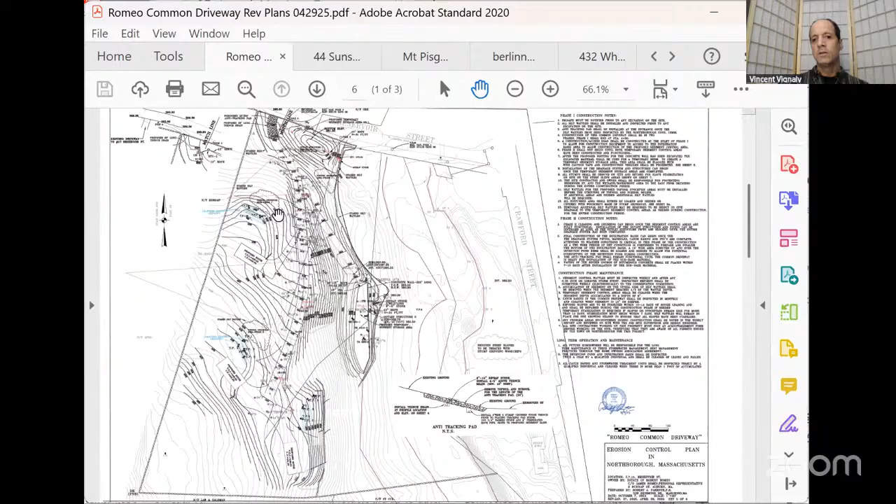The grading needs to be changed, so that's pretty much the process: they have to file and then show they're minimizing it, and that's what they've done.

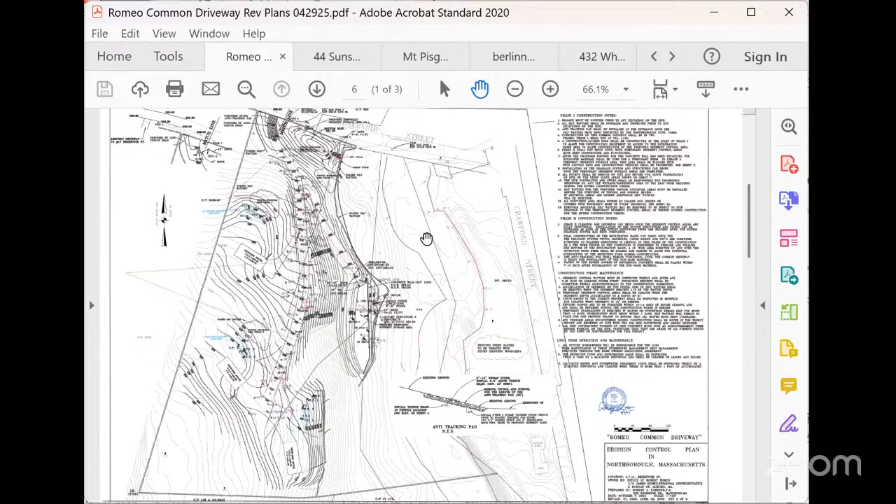Okay, so the areas of trees that would remain, is that delineated beforehand, or is that up to the contractor or developer? No, that is delineated.

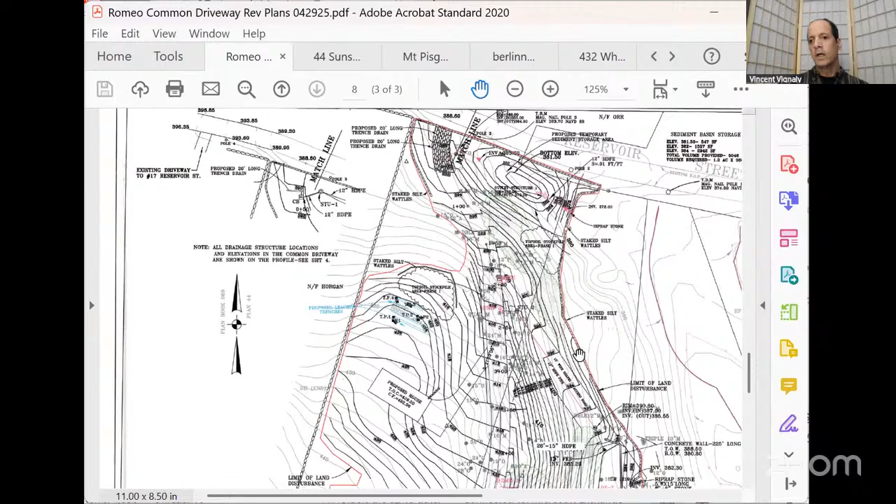It's hard to see this, let me zoom in and not lose the idea. So there's a delineated limit of alteration that runs along here, and this is the downhill side. They also need a perimeter barrier so that any runoff doesn't go down into the brook. So this east side is more firm, but this line here, it's a red line.

And actually, I think that's what that note there says.

The limit of land disturbance will all be surveyed and located in the field. And then it continues on this side here. So they're saving some along the property line up here, and then they're saving this area down here.

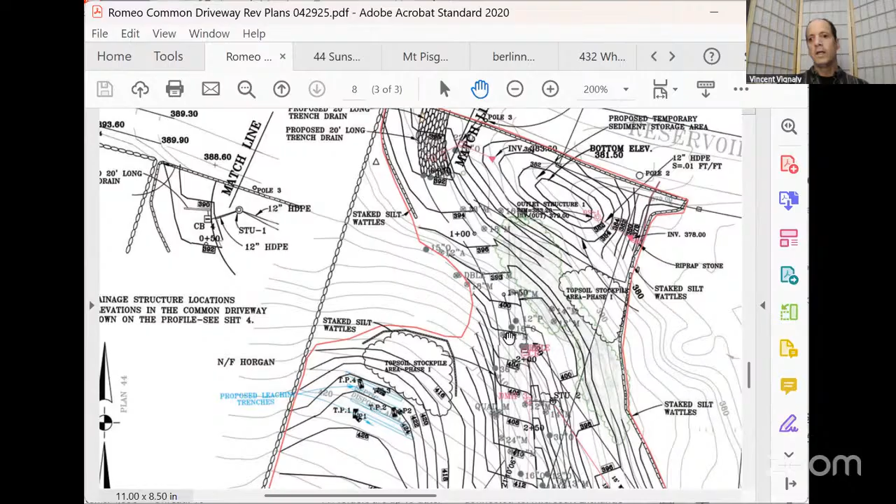So it is delineated on sheet, I think that's sheet 8, if you want to look at the plans that are the same plans that are on the planning board's website.

Okay, thank you. Does that help, Michael? Yeah, it's just really hard to see some of these lines online. Even when you zoom in, you kind of lose perspective, and it's kind of difficult to understand what they mean. There's just a lot going on, so it's hard to see when we look on the planning board site.

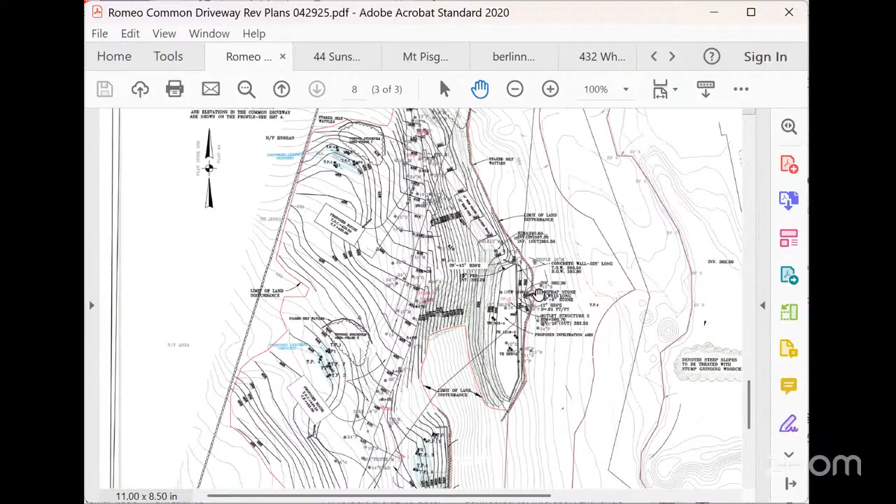But that helped things. Yes, and that's why as part of his application, he started with I think 6 plans, and he's now up to 9. So he's showing things on each plan a little differently, so it's a little clearer. It's still very busy, so that's why I'm an old timer - I like the ones you can roll out and look at them in detail.

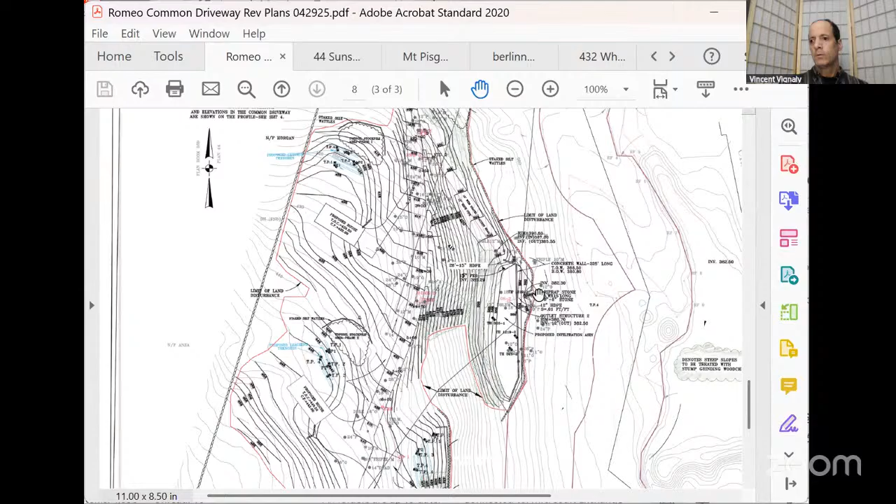Okay, Vinny, are there any hard copies floating around town hall? If you come in, I have hard copies, so we can look through those. I know the planning staff has them as well as myself. So there you go, Michael, there's an option to go to town hall and actually look at the hard copies. And we're open till 7 tomorrow night.

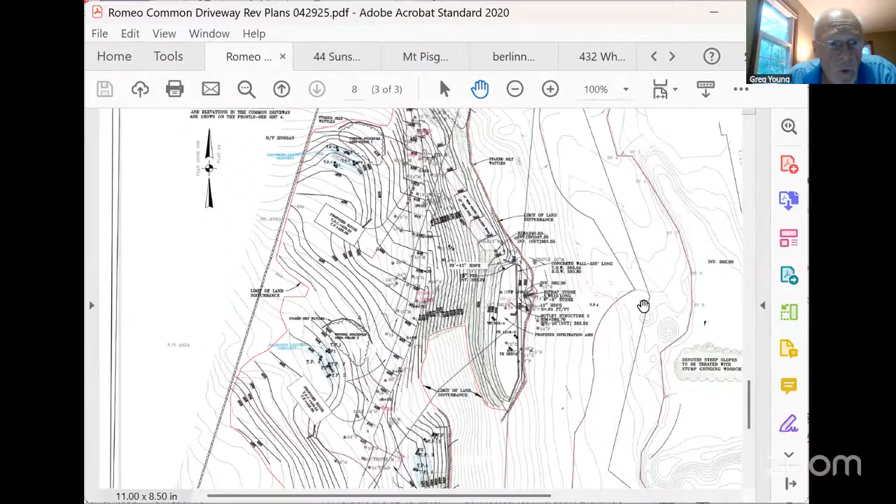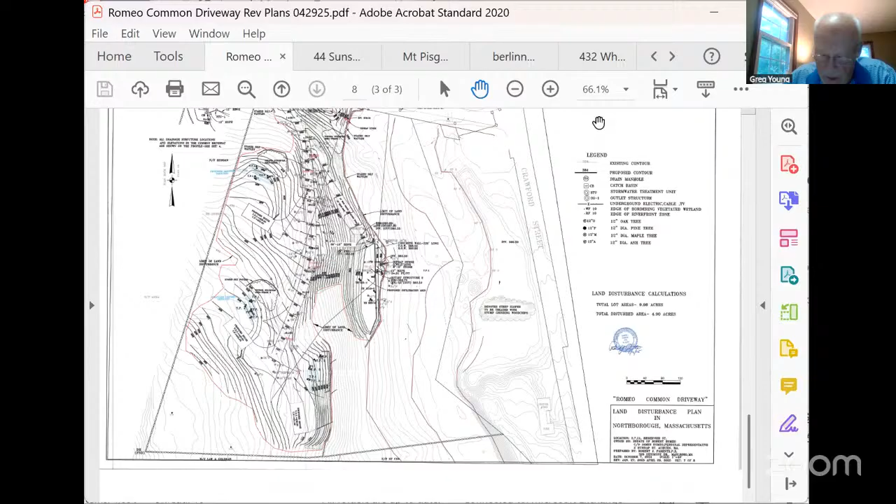Okay, so if there's no more questions, I don't see any more hands up, we can go ahead and vote on this. So let's start by closing the hearing for 3711 Reservoir Street.

So moved. Is there a second to that? Second. Second by Justin. Roll call. Dan Clark, yes. Justin Dufresne, yes. Todd Helwig, yes. John Johnson, yes. Sadie Stone, yes. I vote yes. So the hearing is closed.

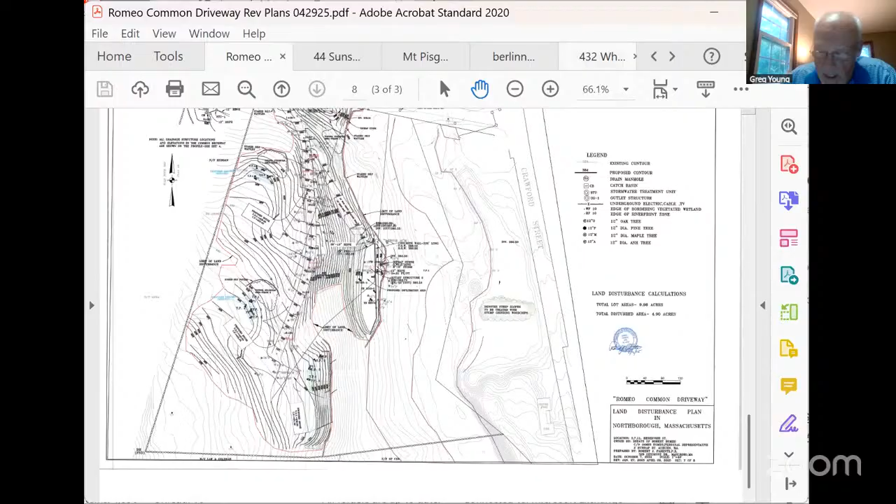So Vinny, we're going to vote to issue a permit. Any special requirement? Well yes, there are special requirements on it. You highlighted earlier about a pre-construction meeting and information prior.

Yes, and this is a land disturbance permit, so we have typical conditions, and they were also required to provide surety, so that if they go out there and alter more than they're supposed to, they have to have a bond, a cash bond posted with the town, so that we're able to execute that bond if something goes wrong, or if they try to walk away and don't stabilize the site, we can bring the site back into a vegetated cover. So that's part of this as well.

And now, who determines the bond amount? I'm sorry, who determines the bond amount? I did. I do it based on a formula that Fred and I had worked out a couple years ago. And what's the number on this one? Ooh, I was afraid you were going to ask that. I think it's $28,000.

Okay, all right. It's based on the 4.9 acres and moving 6 inches of material to get loam out there, and then hydroseeding 4.9 acres and putting up probably about 400 feet worth of sediment control barrier. So it's an estimate, and it should be, it's probably high, but that's the way we like it.

Okay, then we're looking to vote to issue a permit, land disturbance and stormwater management permit for 3711 Reservoir Street. So moved. Is there a second? Second. Seconded by Dan. Roll call. Dan Clark, yes. Jess Dufresne, yes. Todd Helwig, yes. John Johnson, yes. Sadie Stone, yes, and I vote yes.

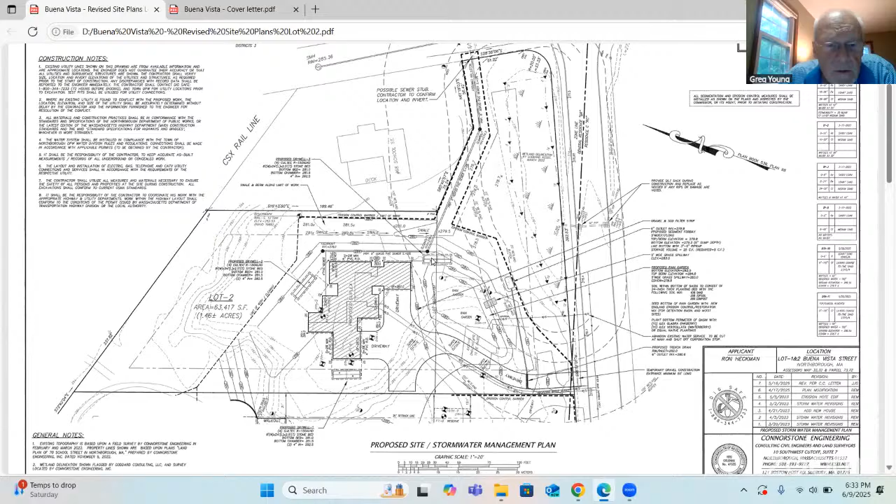Vito, what's for that area that you're going to be working in inside the 25-foot? What's the plan to protect the wetlands from that?

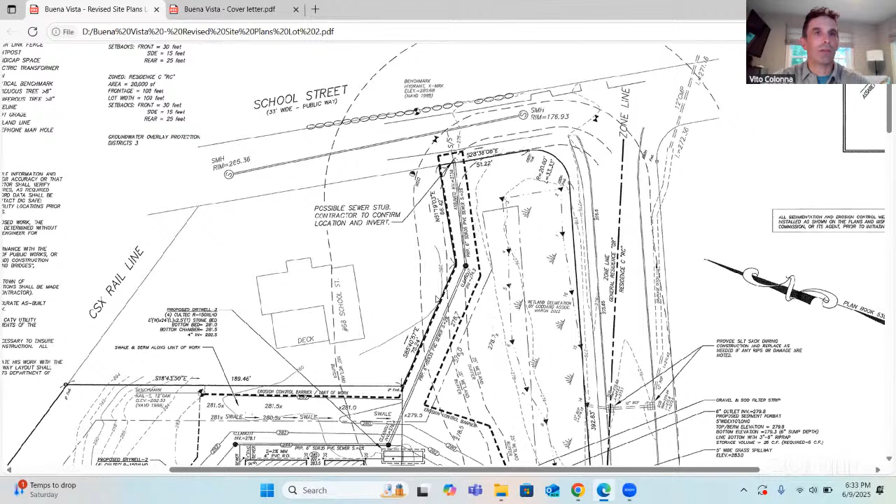So on this we would just have perimeter erosion control, sediment controls. I think on this one we had silt fence with straw wattles, whatever the typical detail we had. Let me just see what we were using, sorry to scroll through. It's a pretty flat area too. Yep, sediment, so it's a silt fence with straw wattles. Yeah, the area is pretty flat through there, right in that section.

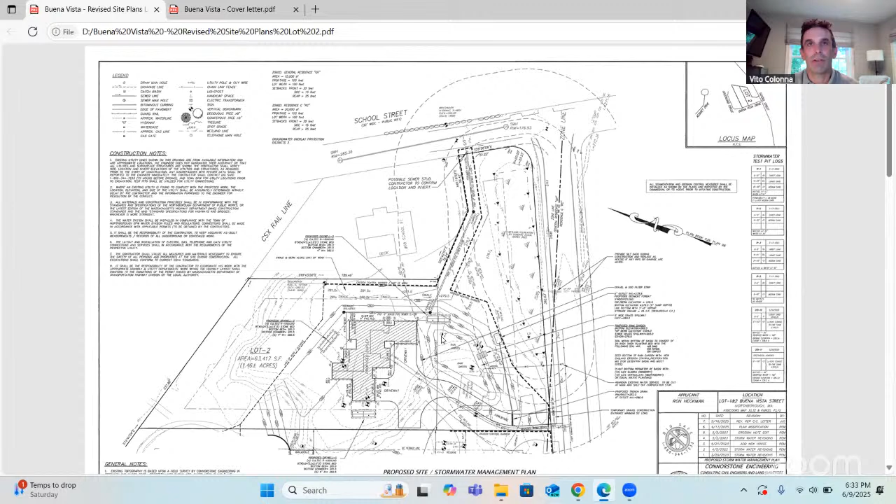So they should be able to get in and out of there fairly quickly, especially if they do this. The intent would be to do this during the late summer when everything's at its driest, so that way they don't encounter much for groundwater, so we can get it in and out of there pretty quick.

Vinny, you're good? I am, yes, he addressed the comments that I had. We were talking about potentially casting, when he excavates this, casting to the uphill side so we have as little impact as possible close to that wetland area, just in case something happens, we get a thunderstorm in the summer, that kind of thing.

Any questions or comments from the commission? Concerns? No? No. Let's see, any audience questions? I don't see any hands up.

Okay, then we need a motion to close the hearing for an amended order of conditions and an amended land disturbance permit, the amended stormwater management land disturbance permit, for 2 Buena Vista Street.

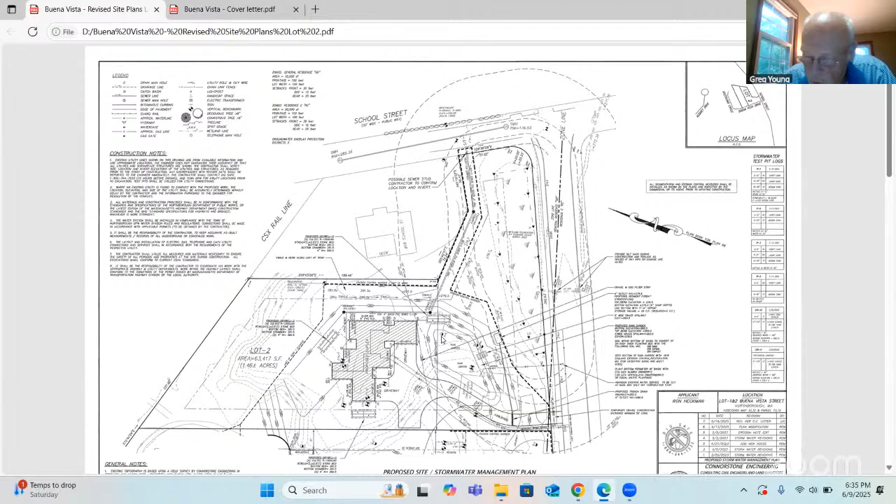So moved. Is there a second? I'll second it, seconded by John. Roll call: Dan Clark, yes. Justin Dufresne, yes. Todd Helwig, yes. John Johnson, yes. Sadie Stone, yes. And I vote yes. Hearing is closed.

Nothing else, no special conditions, Vinny, right? Just our typical conditions, yeah, that would be it, nothing in addition to those. Did we have a marker for signs on this one, on the far side of that stormwater dike, or did I forget the berm? I can't remember if they were included in the previous order. Can you just add that in? They might have been, but I think they would go along with signs, just maybe two signs down there. We don't need a string of them.

You talking about the sewer connection? Yeah, one down near the sewer connection area, and then one up on the back side of the proposed stormwater basin. As you drive up the driveway, the stormwater basin's on the right side, and this would be to the right of that to note there's a wetland in that area. Okay.

So then we need a motion to consider the request to issue an amended order of conditions and an amended stormwater management land disturbance permit for 2 Buena Vista Street. So moved. Second, second, John Johnson.

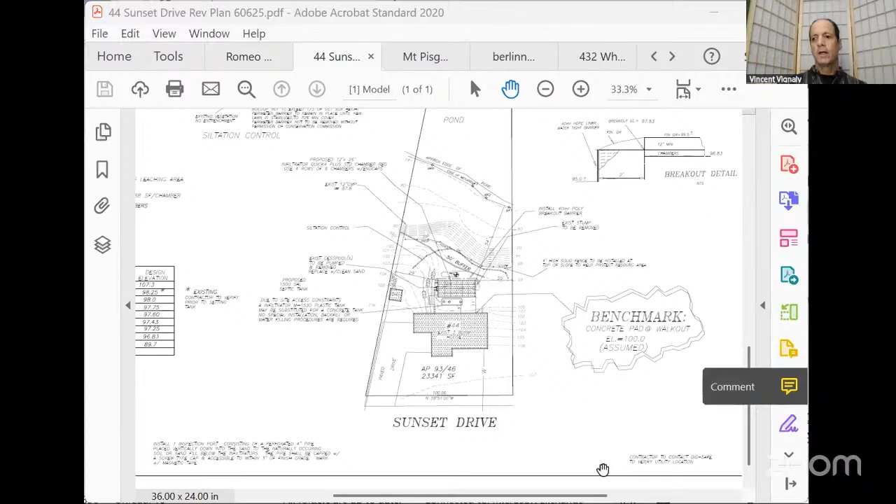All right, and I'm going to ride shotgun, I'm going to pull up the plan on my screen, and either I can present or he can. Bill, I think that's the one. I don't see him yet. There we go. No, we lost him. Maybe he thought I was on a roll. It might be. Bill, okay, Bill, I can see you're there, but you're muted and your camera's off, which is fine, but let's unmute at the very least.

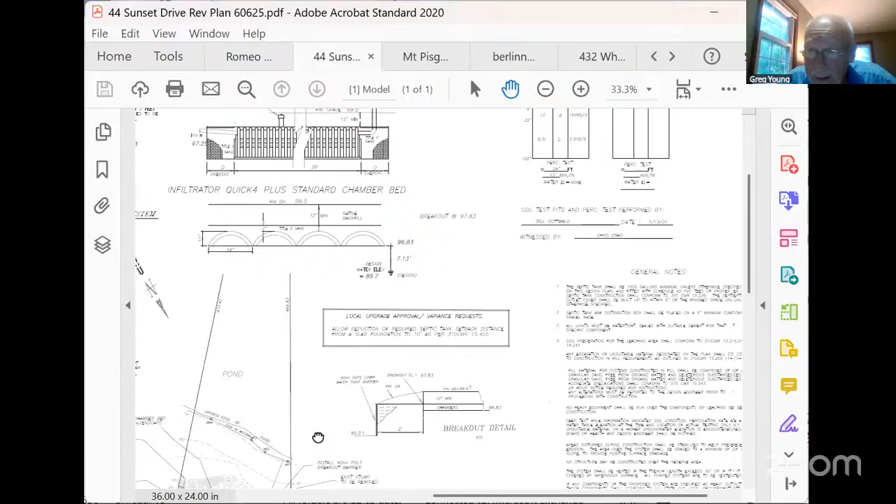Bill, do you hear me? Wouldn't be a Ron, would it, Vinny? A Cindy or a Ron? I don't think so, no. Well, if they're not raising their hand, then yeah, William's with us, but he's muted and he's got his camera off. He said he didn't have a lot of high-tech stuff, but I think the muting he'd be able to handle. William, can you unmute?

Okay, Vinny, I guess you want to do it yourself then. All right, I've got it. So this is on Sunset Drive. Yes, the alignment. Sunset Drive in the drawing is at the bottom of the picture, but that has the north arrow going down.

So just for orientation, this is the big pond wetland, and then farther to the south is the wetland behind McAfee Park there. And so this is Sunset Drive here, and as you drive in from South Street, it's on the right. I'll zoom in a little if I can get up there.

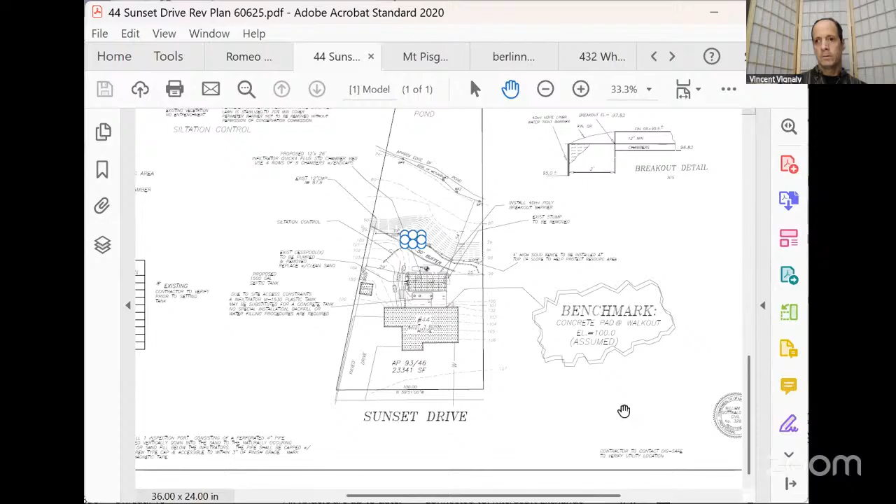So this is a site where the house is set up close to the road. It's an existing house. It has a failing septic system in the rear, and they're proposing to install a new septic system, and the wetland is in the back here. So there's the pond, edge of the pond is here. The wetlands are very close because this is a very steep slope, and so their closest point is here, about 52 to 54 feet away from the septic system.

We have a bylaw in town that prohibits new septic systems from being within 100 feet of a wetland, but they're allowed to be within that 50 to 100 feet if it's a repair and there's really no other feasible option. In this case, they have some very mature trees out in front, and they would have to pump the sewage from around back because the existing sewage comes out the back. It's proposed right here to go into a septic tank and then into a special leaching area that allows for additional treatment, so they have a little bit smaller size because the treatment method has higher efficiency. This hasn't been approved by the Board of Health yet, but we're waiting for that - they wanted to come to the commission first to find out if there were any concerns. As long as they're 50 feet away, that's the concern in the bylaw.

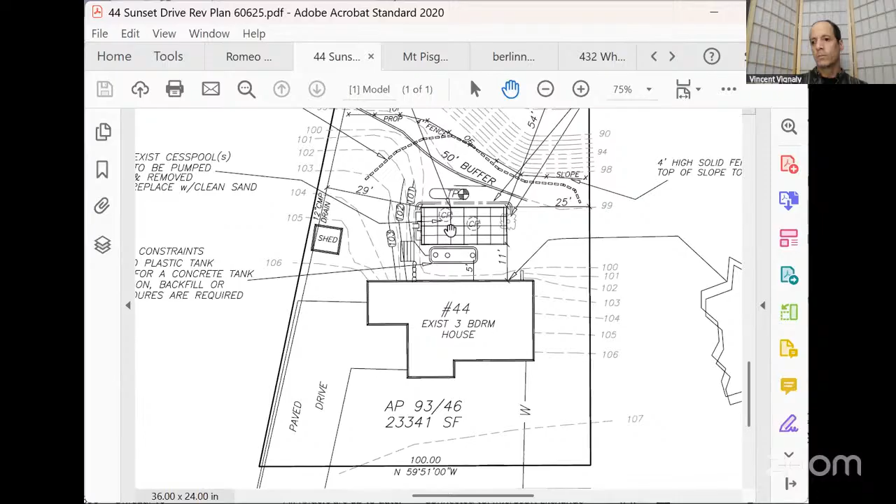So I would like to add a condition that based on a decision by the Board of Health on the number of existing bedrooms in the house - if it's 2 bedrooms, then they're going to need to refile and amend their order of conditions, but if it is a 3-bedroom, then they would be allowed to continue and go on as proposed. Sure, that sounds reasonable to me.

So it is an improvement. They're doing a lot of work on the house. It was an old timer that was there, and he hoarded things, so they spent about a week with dumpsters just hauling stuff out.

Okay, I guess I'm open to questions. Any questions from the commission? I've got a hand up here too, from iPhone number 2. Let's find out what that's about. Okay, iPhone 2, I'm bringing you in as a panelist.

In process. Anybody there? Nobody's there. Can you hear me now? I can hear you, yes. I'm sorry, this is Bill Gottwald, I'm the engineer. I just got a new iPad earlier today and was trying to set it up, and that's why I couldn't get through. I get it, not a problem.

Vinny told everything. The only thing I'd add is that right now it's a cesspool, not even a septic system. I checked the building records. The building permit was issued in 1957, occupancy in 1958, and they have no record of anything ever being done as far as bedrooms.

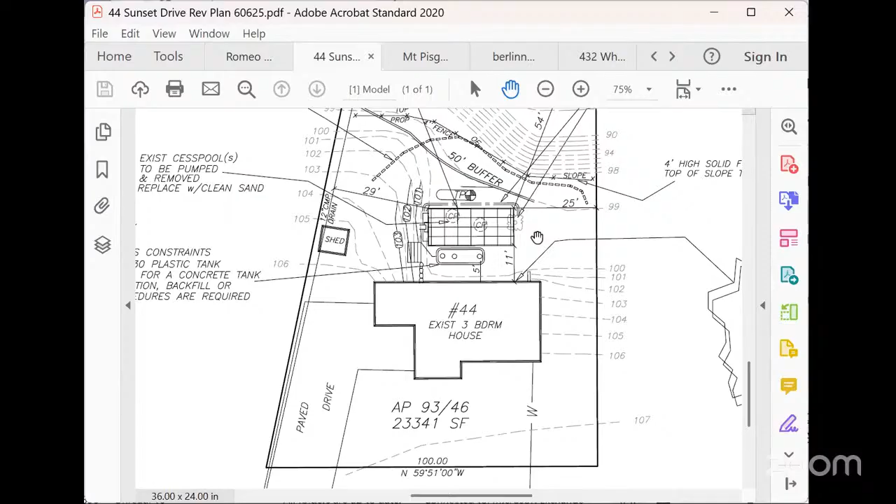Any questions? Good, thank you. Any questions from the commission? No? Everybody's comfortable.

So Vinny, you're looking to have the special condition you mentioned earlier - if for some reason it's considered a 2-bedroom house now and it goes to 3, this deal is off and they'll have to refile. Yes, or request an amendment. Yes, fine, okay.

Okay, I've got another hand up here. Hold on, Cindy. Cindy, we'll let you speak. You can talk, you should be unmuted. Yep, good. Go right ahead. Hello? Nope, nope. Nothing, Cindy, huh? Can you hear? Well, if I can ask you can hear me, that's probably not going to help. Okay, well hopefully you're unmuted and okay.

So, Vinny, where were we? I'm sorry. Unless there were other questions, I think we're ready to vote to close the hearing. Okay. Last chance, Cindy. Okay, we need a motion then to close the hearing.

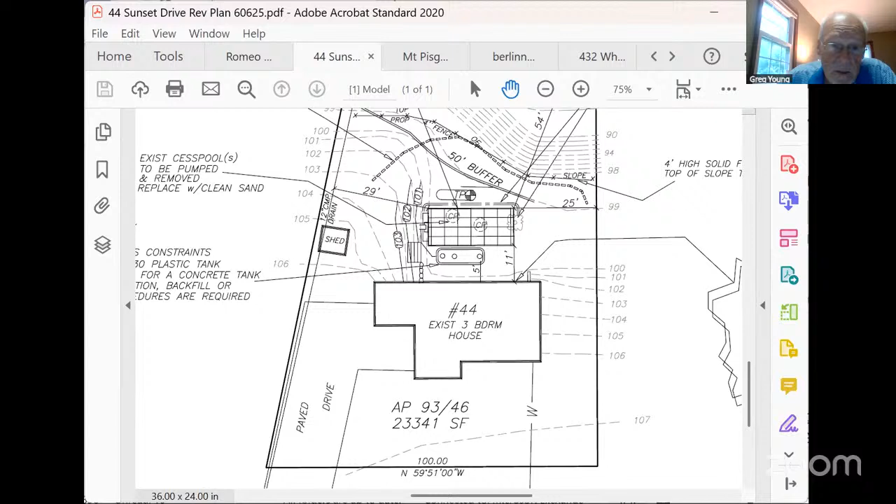Yes, yes, okay. So we need a motion to issue a negative determination for 44 Sunset Drive with conditions as outlined. So moved. Is there a second? Second by Sadie. Roll call: Dan Clark, yes. Justin Dufresne, yes. Bud Helwig, yes. John Johnson, yes. Sadie Stone, yes. I vote yes. All set.

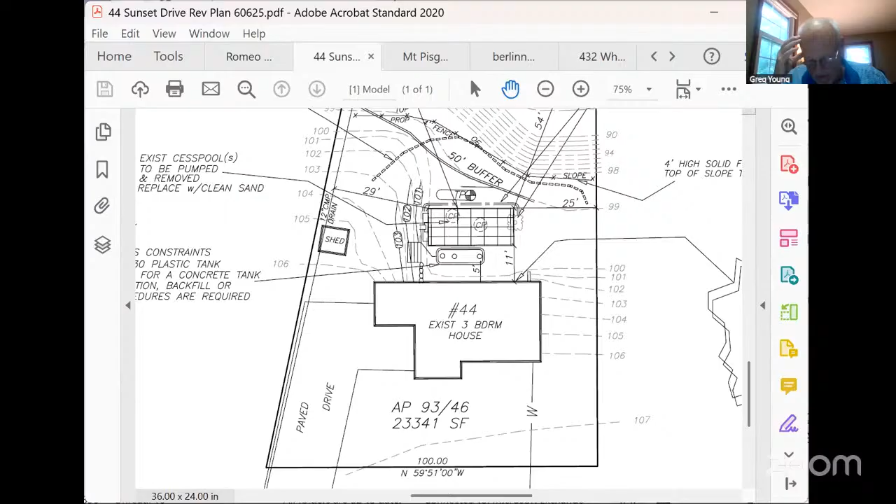Okay. Continued notice to amend the Northborough hunting policy on conservation land. We talked about this a couple of months ago.

To allow deer hunting on all conservation land, subject to some requirements. Vinny, do you want to encapsulate that for us? Yes, what has been advertised would allow the commission to...

Rescind all the policy requirements on hunting listed in the town's hunting policy enacted in 2001. We talked at the last meeting about limiting hunting to deer only and complying with all other state and federal requirements. There's currently a high deer population, and it would be helpful for vegetation and flora to have some control on the deer that are overgrazing.

There've been deer strikes, so the DPW director submitted a letter supporting the idea of allowing hunting. I contacted the police chief, and his statement was that hunters are good rule followers, and whatever gets put in place he's sure they would comply. He has no hesitation to change the policies however the commission sees fit.

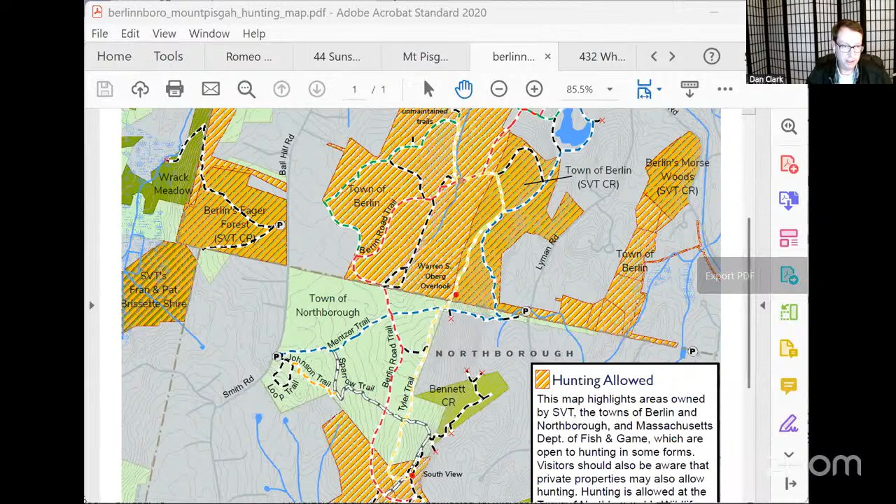So Dan, there are still some protections — the statewide protections will still be in effect. Some people raise safety concerns; I hear that a lot from non-hunters about being in the same woods with hunters. Those regulations address some of that, but more importantly, the facts show there are almost no instances of non-hunters getting injured by hunters. Typically it's hunters who injure each other accidentally — that happens more than anything else. There are plenty of good examples around Central Mass where hunting and other recreational activities take place simultaneously, and a lot of people know that and start wearing hunter orange around that time of year and go about their business.

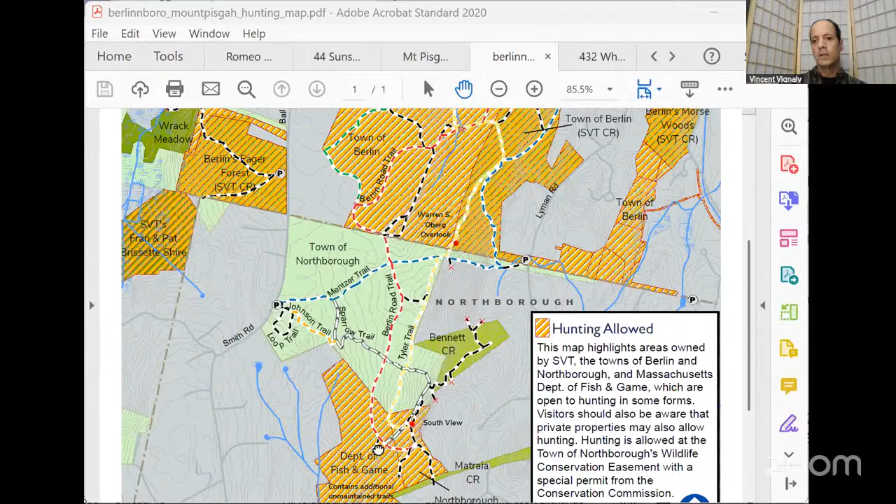While Dan was talking, I brought up the Sudbury Valley Trustees map. This is the town line between Northborough to the south and Berlin to the north, with Boylston to the west. The hatched, tan-colored areas are allowed for hunting. This green area in Northborough, owned by the Conservation Commission, is where hunting is limited, and the area directly south of it too. Even going down that trail into Northborough, you're in the huntable area within the Fish and Game land — the Division of Fish and Wildlife allows hunting there. This is what we discussed at the last meeting: once you're on that trail, don't assume hunting is prohibited just because you're on it — it's allowed to the north and to the south.

Okay, all right. Any more thoughts from the commission on this?

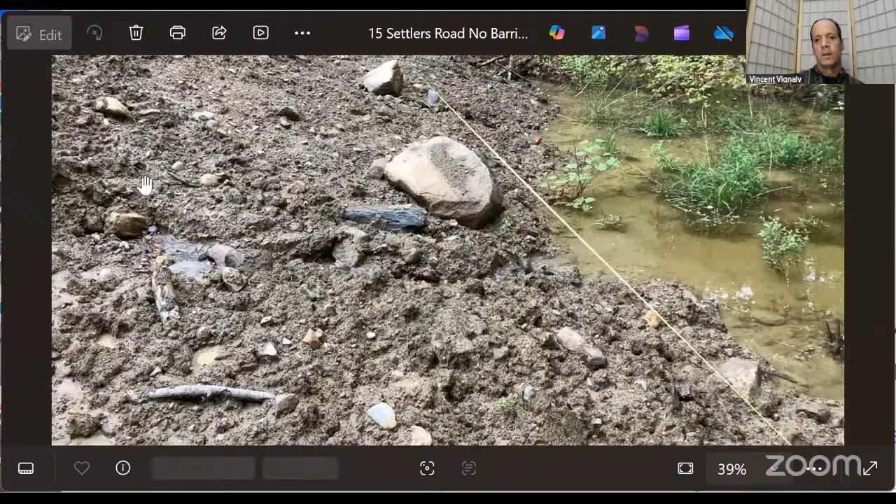That's sediment, turbid water with wetland plants popping out. So that's not a good situation. There's a trickle of water, actually a flow of water that comes right out here and is washing more turbid, more sediment-laden water out. And this is the wetland with no barrier. You can see that this is a wetland here with the tree growth, but there's no barrier between this altered area and what was an isolated wetland.

And I'm going to close this to get back to another image of the plan so you can see what was possible.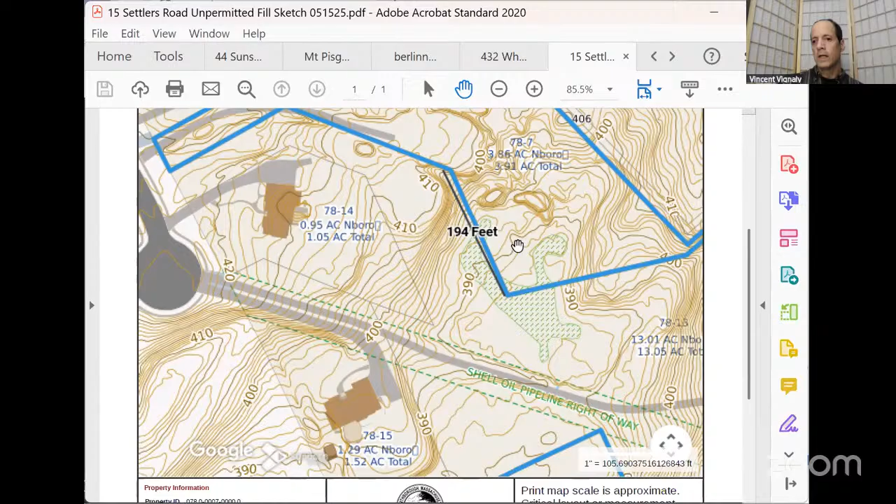So we've got a situation where a lot of fill is unapproved. The commission issued an approval on this under the local bylaw only because this is an isolated wetland. So they were supposed to build a driveway to a house and have a yard, but they were supposed to have erosion sediment controls around this area here.

None were shown along the back. I think there was a problem with issuing this permit because I believe that there are wetlands within 100 feet of this work. So again, this is another one where I need an enforcement order to encourage the property owner to install the erosion controls or sediment controls that were approved, and then file with the commission to determine whether this really is a wetland.

Which really looks like it is a wetland from the map. Is that... what's that number? Nope, that was the other one, sorry.

This is the area that is shown for the property owner that lives here at 17. They have an order of conditions that shows this area as wetland all the way up and around here. So I believe that this is wetland here that was not shown on the original submittal for this 15 Settlers. So we've got a little bit of work to do on this one.

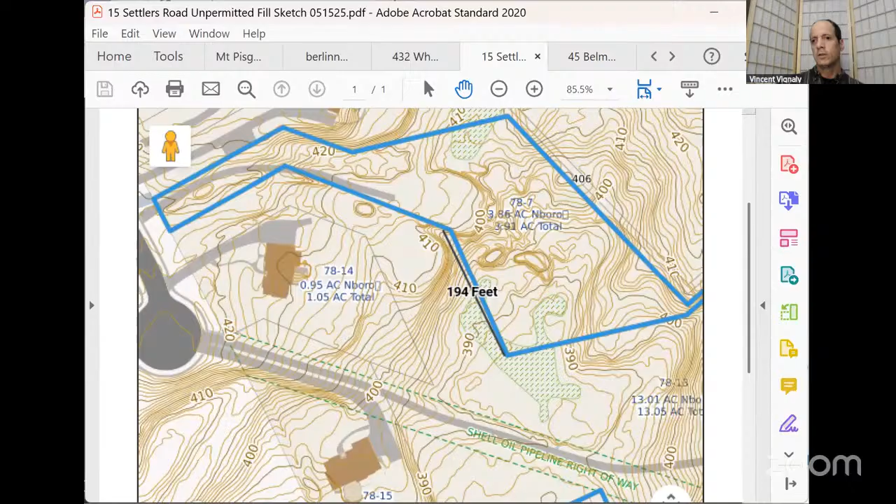So I'm going to pull out of this one, and then I'll pull up those photographs again. So this photo is looking from the middle of that lot that was in blue, looking to the north, and this is the isolated wetland, and there's no sediment controls out there.

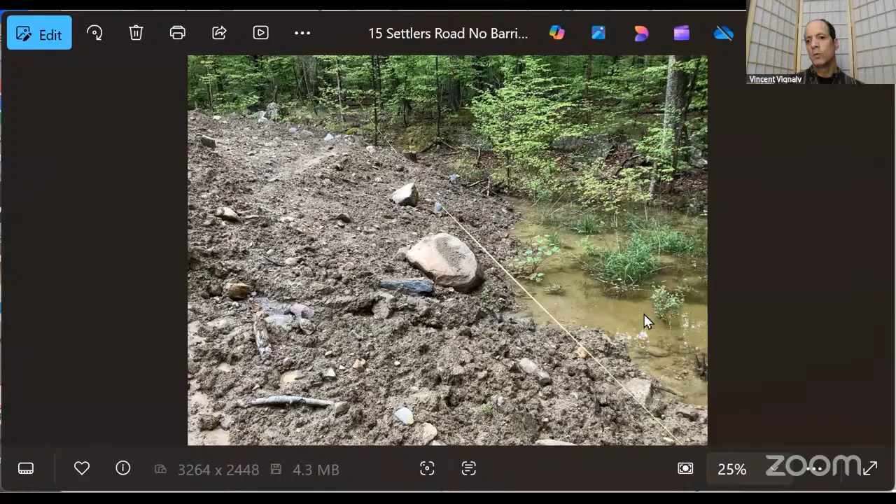This is down at the right side at the limit of the work with the wetlands and the limit of fill, with no sediment control.

A different view of that same area, and this is looking down to the property at 17 Settlers. You can actually see some of the driveway kind of through the trees, way in back. You can kind of see something there, and that's where there's a culvert that goes down and feeds the wetlands downstream as well. So this is a wetland that's connected through.

So what I'd like to do is get an enforcement order. I'd asked them before this meeting tonight to install sediment barriers here and up on the other side where the isolated wetland is in place. I went out there last Thursday, and there were no barriers in place. So that's why I'd like to get an enforcement order issued on this one as well.

Okay, did they actually fill the wetland there? Yeah, I think so. It's hard to tell, but the first thing was to stop the bleeding, try to contain the site, and then have them hire a wetland specialist to dig this stuff out and find out if there's wetland soils underneath there, and keep looking back farther and farther until they don't find wetland soils.

What is all this fill? What's he doing with it? He's preparing for the house to build? He's putting a house and a septic system in there. And that was going to be my question: has he pulled a building permit for those yet?

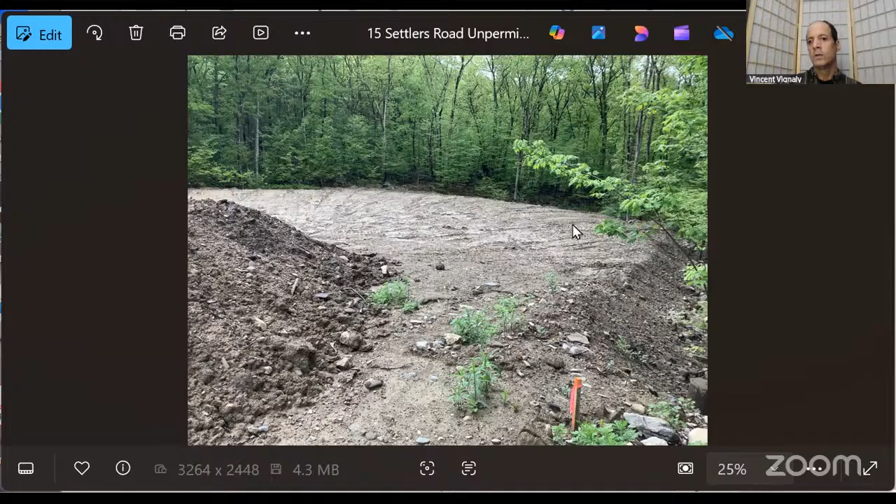I also talked to him about, it's a big open area, so he could grade this - excavate this area down here in the short term, build a berm around the outside, so any of the flow coming from here gets caught in that basin before it gets discharged. But the first step really is to get a barrier around the outside, because there's wetlands over here too, as well as the pictures that were taken over there.

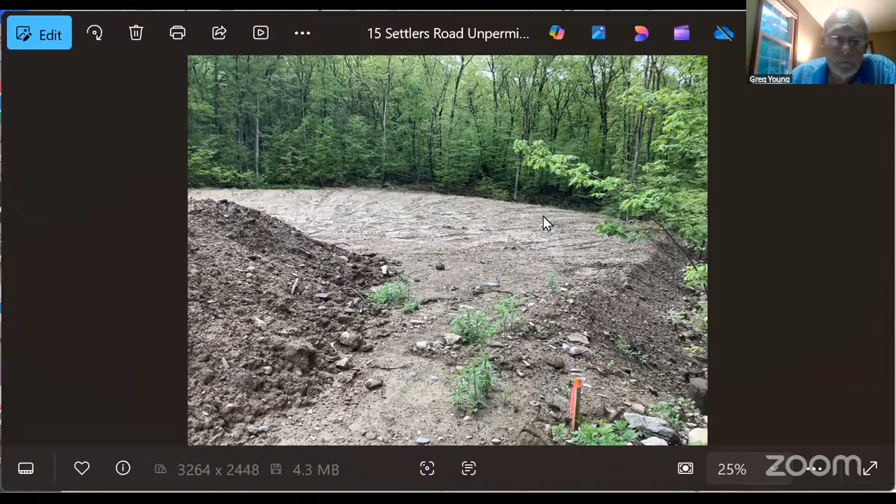This one's a mess. Yeah, I'm looking at an aerial from April 10th, and he's almost at the property line at that point - that is the property line. And I'm assuming he's done more work since April 10th. That was almost two months ago in this aerial, and he's pretty close to the property line at that point.

I believe this tape measure he's got out there - you can kind of see that, maybe not - it is a tape measure. The guy who was doing the sediment control, once he got the enforcement order, hired someone to go out and do sediment control, but the guy wasn't real familiar with installing it, and was just digging a 4-foot wide trench to put the straw wattle in. So I suggested he hire someone that knows what they're doing and put it in appropriately, and contact me before he does anything, and I haven't gotten any contact.

So to answer your question earlier, when he files with us, he's going to have to delineate the wetlands too, and file a notice of intent, to clean this up. He's going to file a land disturbance permit and then also a notice of intent, because unless they can get a wetland scientist in here who can prove this is not wetlands, I believe it's wetlands, and he's going to have to file a notice of intent.

The commission has approved an order of resource area delineation on this, and it did not show a wetland in this area. So that's why we have a bit of a discrepancy, and that's why I want to get a wetlands person in here, but just after we stop the hemorrhaging.